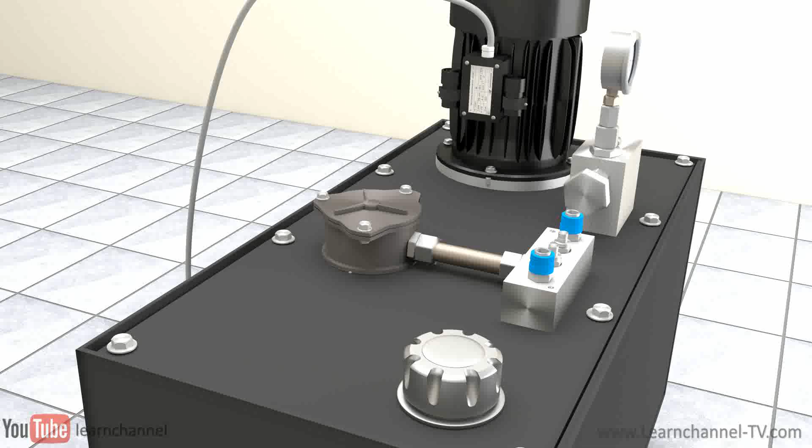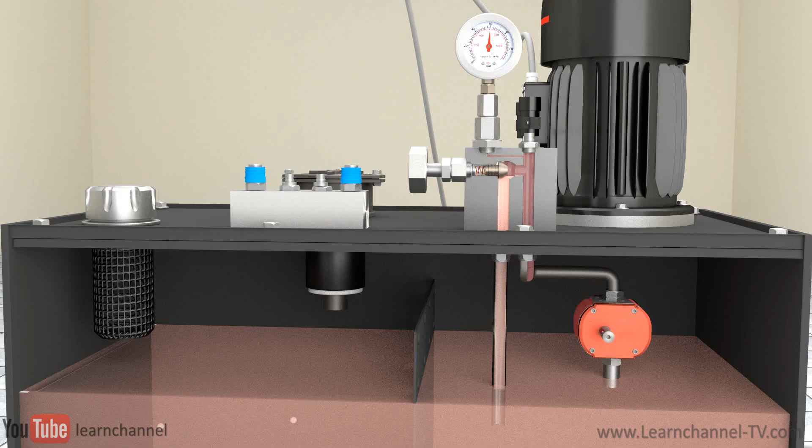The hydraulic power pack is the energy unit of any hydraulic system in the field of automation. The pump can be considered the heart of this supply unit, which supplies the volume flow for the actuators, such as the cylinders or hydraulic motors.

In automation, pumps are mainly used that work on the principle of positive displacement. In this video, we take a closer look at the gear pump, which is installed in our hydraulic power pack.

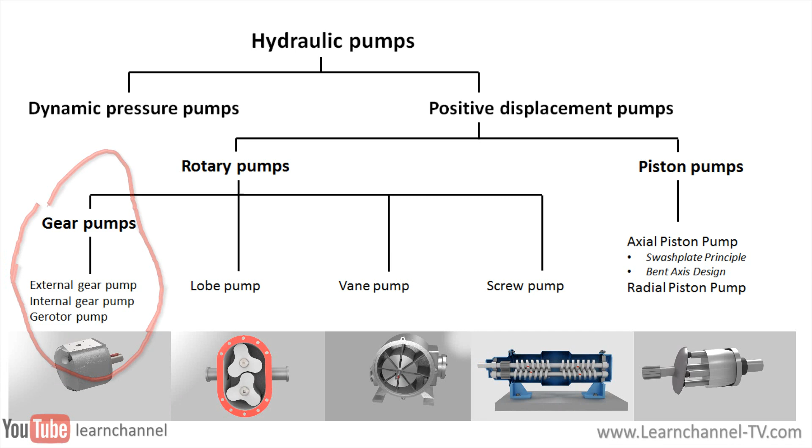External gear pumps are compact, have few mobile parts, and therefore are relatively inexpensive. Two gears, usually equal in size, mesh with each other inside the housing. The drive gear is an extension of the drive shaft. As it rotates, it drives the second gear, called an idler gear.

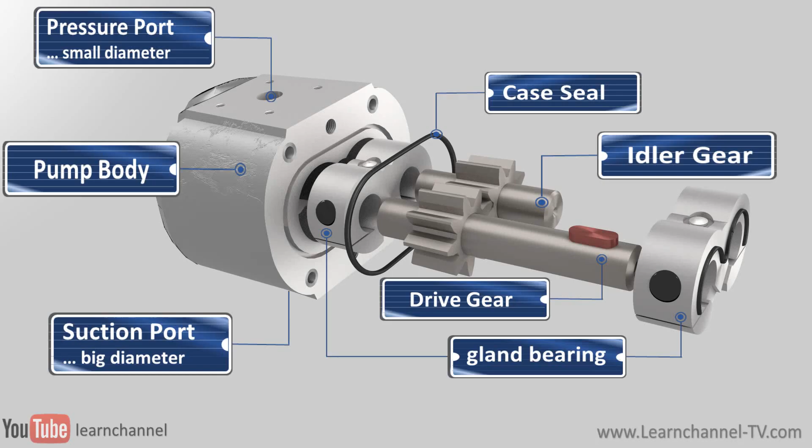When the pressure becomes too high, the oil comes up through the bearing clearance and goes through the notch back to the inlet. This way the pump protects itself against being damaged, but the volumetric losses also increase with high pressure. Let's mount the parts together once more and watch how the pump works.

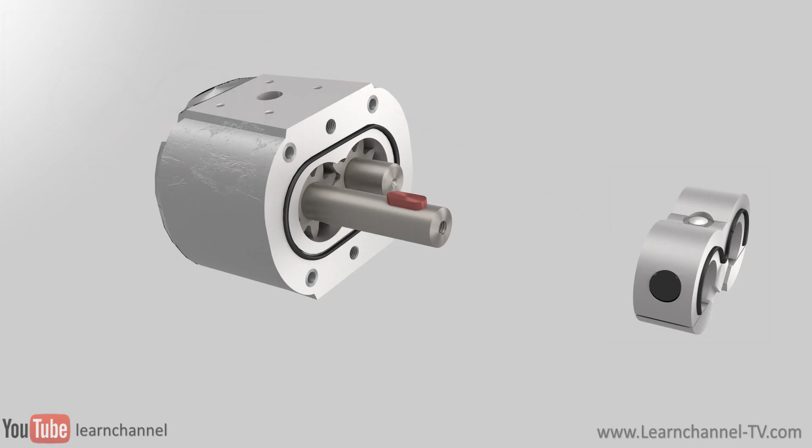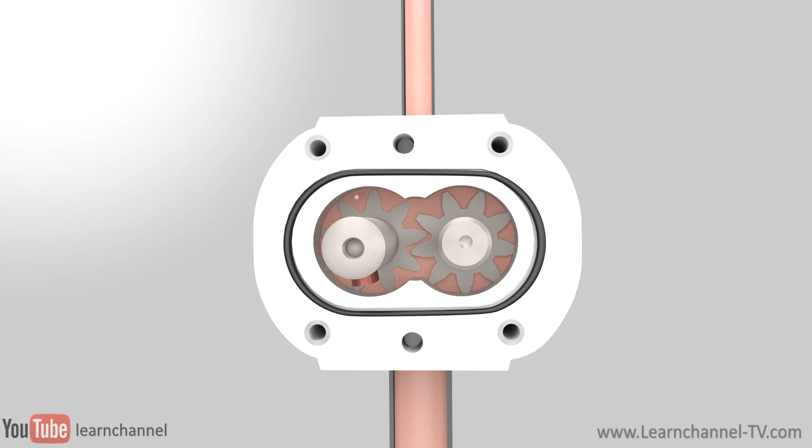When the wheels rotate, the tooth gap is closed by the opposite tooth, but when a tooth emerges from the gap, negative pressure occurs. The bigger the teeth and the higher the pressure, the worse the pulsation of the pressure gets at the outlet of the pump. To prove our statements, we conduct a test on our hydraulic power pack.

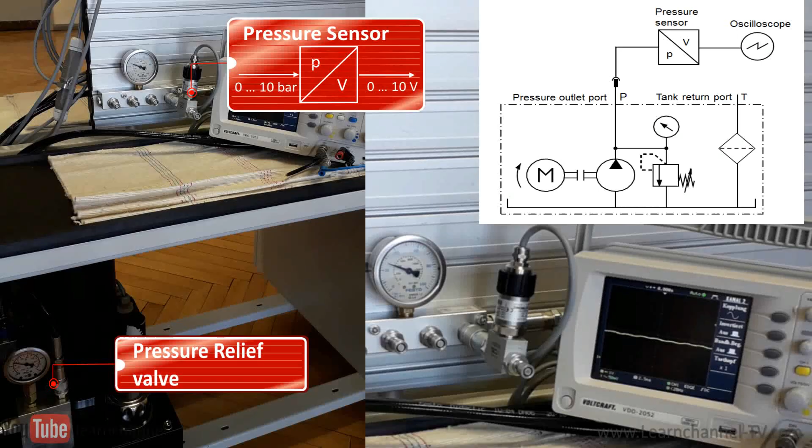Right on the port P, we connect a pressure sensor. The signal of this sensor we can see on an oscilloscope. We can adjust the system pressure using the pressure relief valve, which is a part of our hydraulic power unit. Indeed, the pulsation seems to be proportional to the pressure.

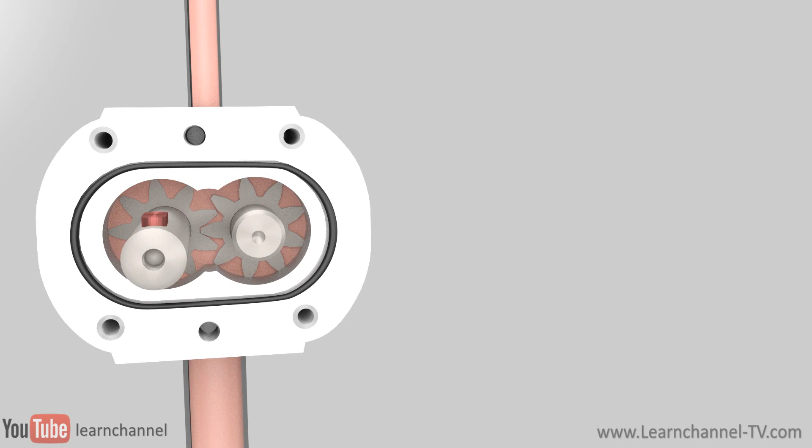In addition to the mechanical losses due to, for example, friction, every pump also has oil losses, called volumetric losses. Oil trapped between the gears and leakage reduces the volumetric efficiency of the pump.

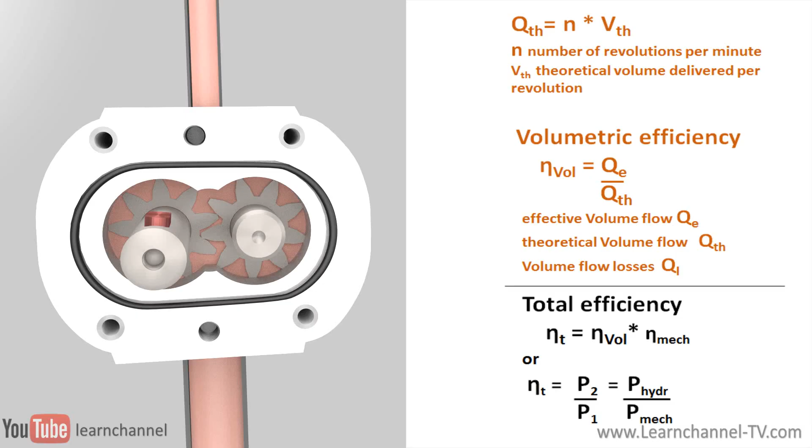The theoretical volume flow, that means the volume of oil that the pump should deliver per minute without considering the volumetric efficiency, can be calculated very simply. By the way, the volume per revolution is a constructional characteristic and therefore of fixed size. That's why gear pumps can be categorized as fixed displacement pumps.

So the total efficiency can be determined in two ways: either via the multiplication of the mechanical and the volumetric efficiency, or via the relation between output and input power of the pump.

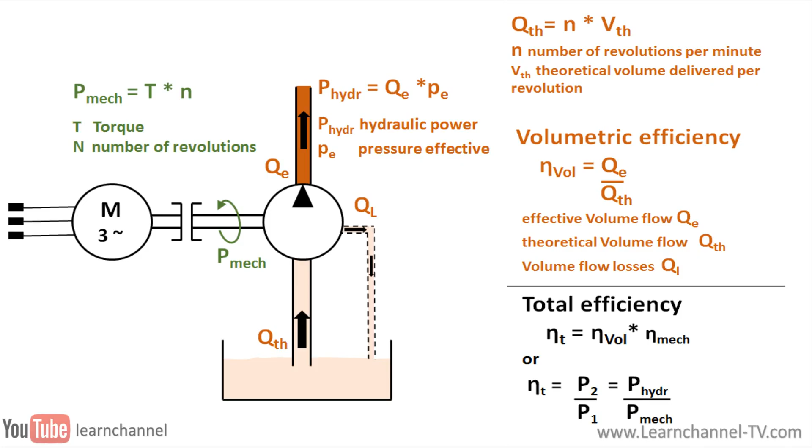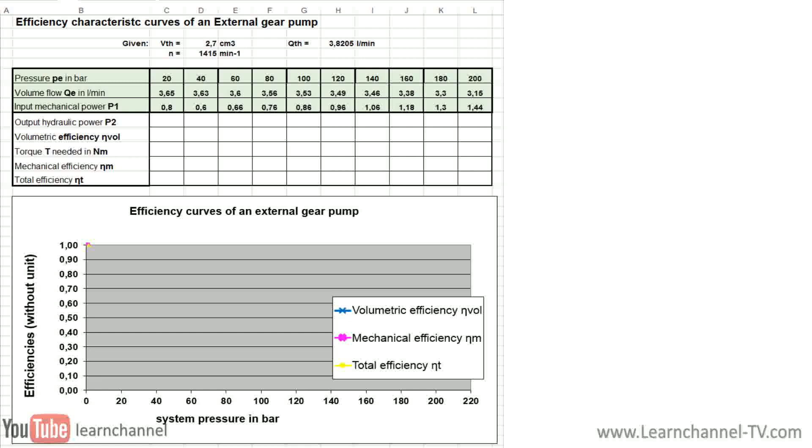The following measuring table shows the volume flow and the mechanical input power in dependence on the system pressure. The other values you can evaluate. What you see is that the volumetric efficiency gets worse with growing pressure. And of course, the total efficiency curve must always remain under the other curves.

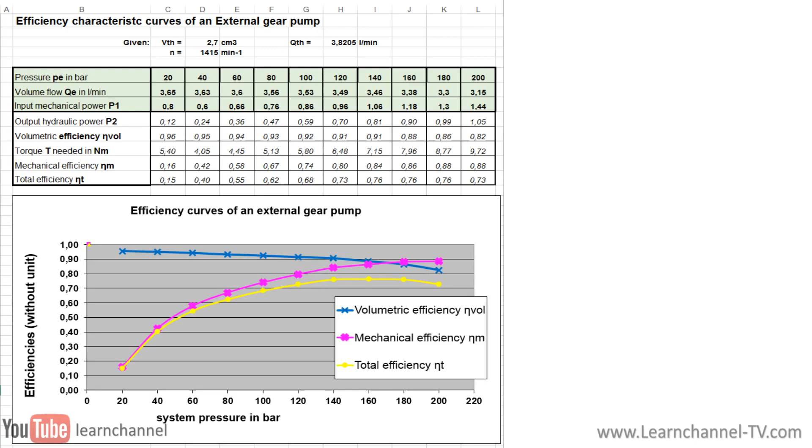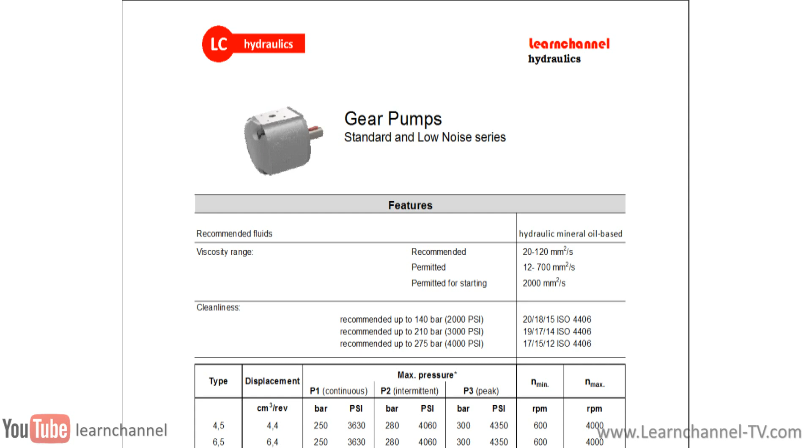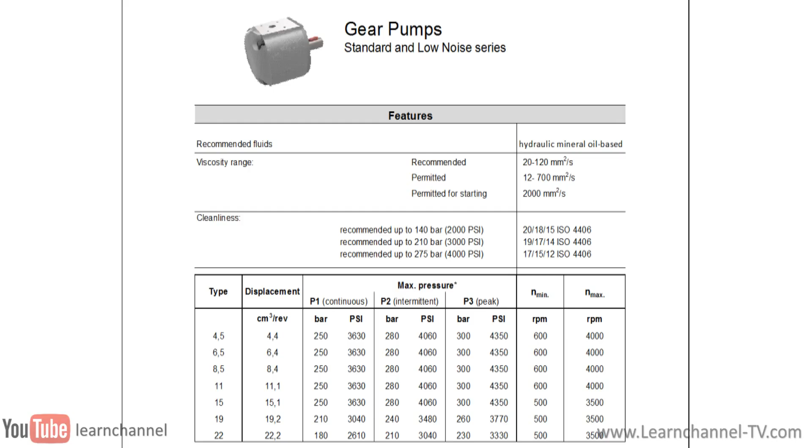How do you determine the volume flow of one of these pumps? It's easy. The rotational speed, which has to be within the permitted range, should be known, and you can apply this simple equation, which we already discussed.

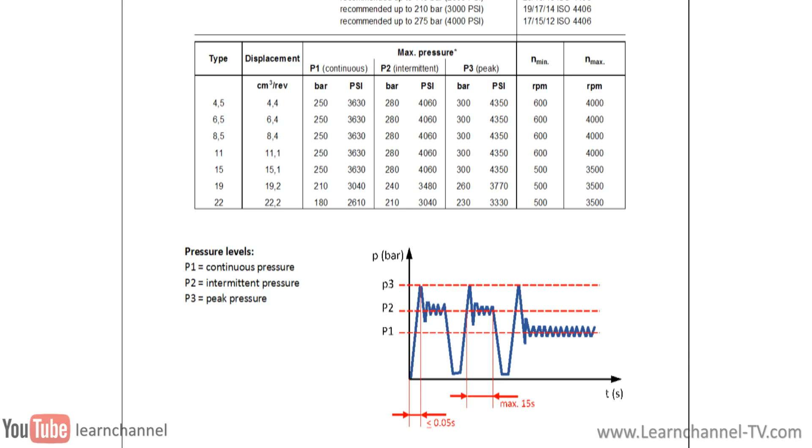Also interesting, this table distinguishes between three pressures. Peaks in pressure can occur due to external load, for example. A check valve at port P or a surge tank can protect the pump from the pressure peaks.

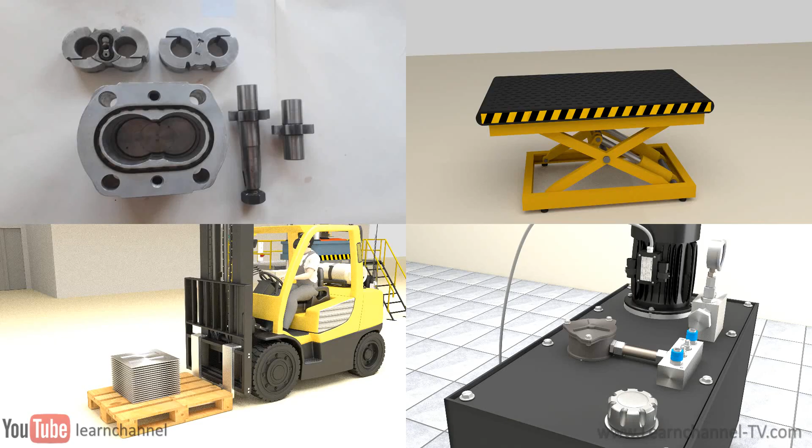External gear pumps are widely used in modern hydraulic systems due to their high performance and long service life. This pump consists of relatively few parts, with the advantage of low purchase and maintenance costs, but they are also considered to be rather noisy.

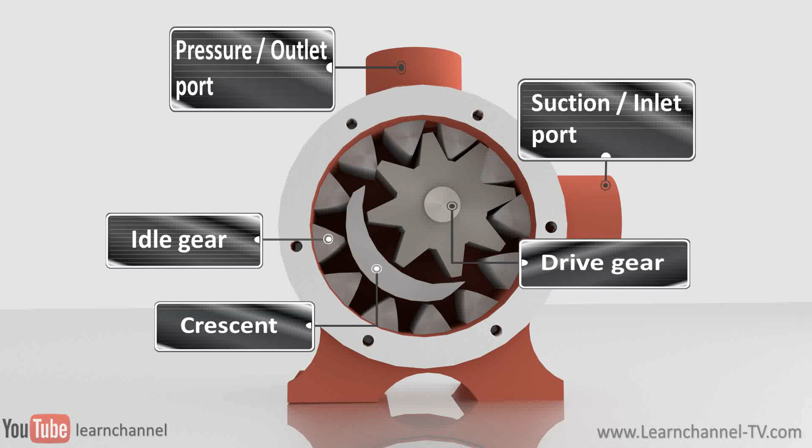This pump belongs to the fixed displacement pumps. Liquid enters the suction port and travels between the teeth. The crescent divides the liquid and acts as a seal between the suction and the discharge port.

In addition to their wide viscosity range and wide temperature range, the internal gear pump is almost non-pulsating. They can be birotational, which can be used to fill and pump out vessels. This pump is used within a medium pressure range up to 300 bars.

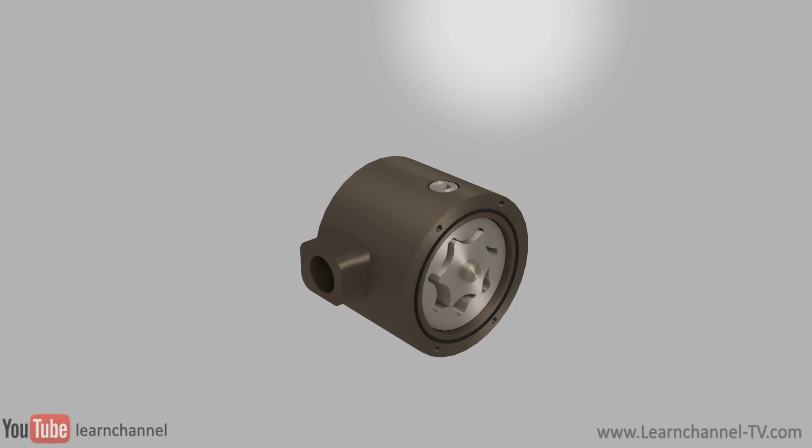The name gerotor is derived from generator rotor. They belong to the internal gear pump without crescent. The two gears are in sliding contact. One gear is driven by a motor, the other is the idle one. The gerotor gear has one more tooth than the internal gear.

This pump has few parts, therefore it is highly reliable and of small size. You find this pump in lubrication systems and in low or moderate pressure hydraulic applications.